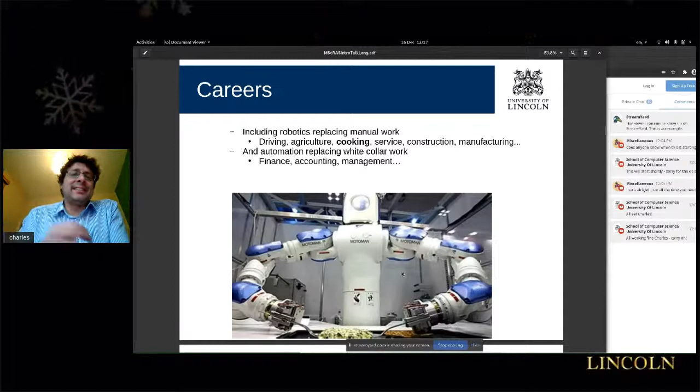If we continue going through the food chain, we're seeing automation beyond the agricultural field and going out into food processing - both the factories and cafes and restaurants - using systems such as this robotic meal maker here.

Traditional industrial automation takes place in factories with conveyor belts and production lines. Many of the techniques we teach on the MSc are appropriate in those settings, but we're also seeing this much more precise, customization version of robotics in the food industry.

So here's a robot that is preparing one meal as a human chef would be preparing it. Now that means every meal can be a little bit different, customized to what the customers are asking for. That's different from the traditional process of making 50,000 tins of soup that are all exactly the same.

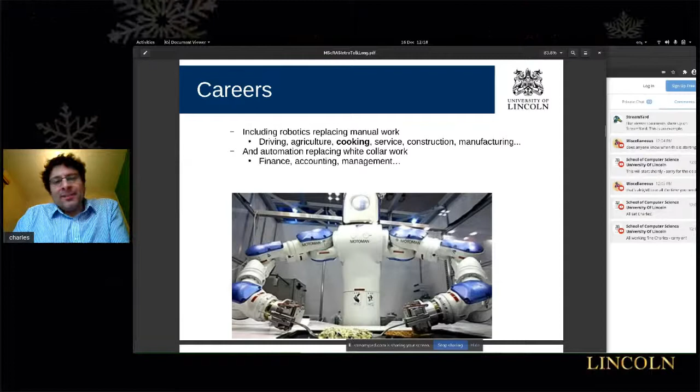So this kind of system is going to require a lot of advanced AI. On a classical production line, you can pretty much do the same movements on every robot every time - the robot arms you see on a vehicle production line are normally just going through a pre-programmed sequence of motions. Whereas highly interactive food preparation like this system is going to be all about monitoring the state of the food, looking at it with your cameras, with your eyes, and figuring out what you're going to do in response to how the food is moving around.

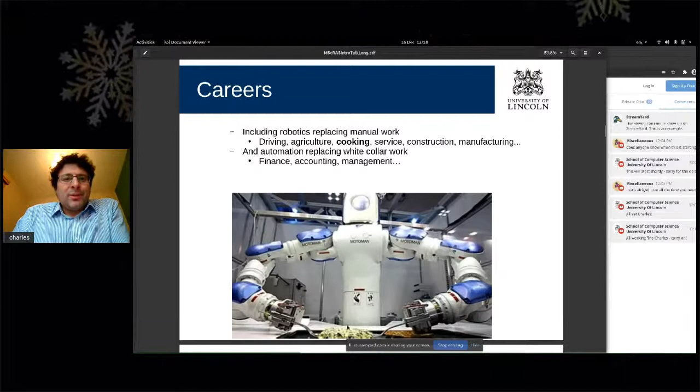Food and agricultural products in general can be much more natural and therefore much harder to predict their behavior than purely mechanical components like the metallic components of a car on a vehicle production line.

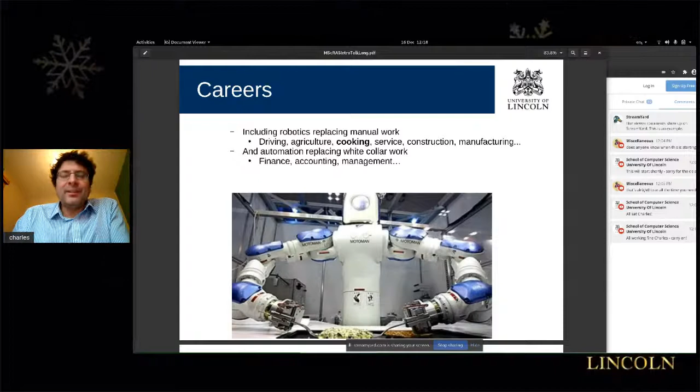Especially during the COVID pandemic, we are generally concerned to reduce the amount of human interaction in the economic part of the world. So applications of robotics to delivering stuff to end users has become very relevant recently. This includes last mile delivery vehicles, small robots that run around the city and deliver Amazon packages or Deliveroo pizzas to people's houses, taking the human away from the doorstep, which is a potential vector for COVID-19 transmission.

You might also see this occurring in places like cafes and restaurants, where you want to remove the need for human service staff to come and make the last few meters of delivery of the food to customers' tables.

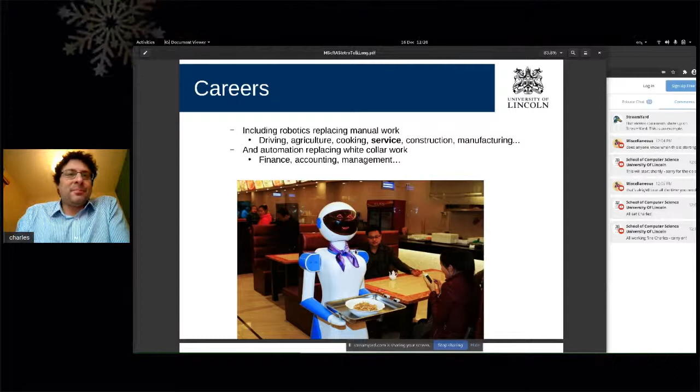This kind of technology was once science fiction, and it now exists for real in a few places in the world, especially in countries like Japan, which are culturally predisposed to robotics. It began as a gimmick - come to our restaurant, it has robot waiting staff. Now it's becoming much more realistic for much wider use and more safe and hygienic use.

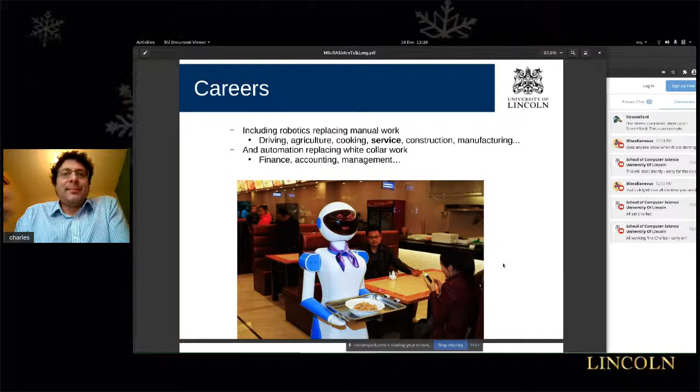And we have robots like this developed here in Lincoln. If you visit the Lincoln Collection Museum, for example, you'll already find one of our robots looking quite similar to this, which is acting as a robot tour guide. It's showing visitors around, recommending exhibits for them to look at, telling them the backstory of some of those exhibits.

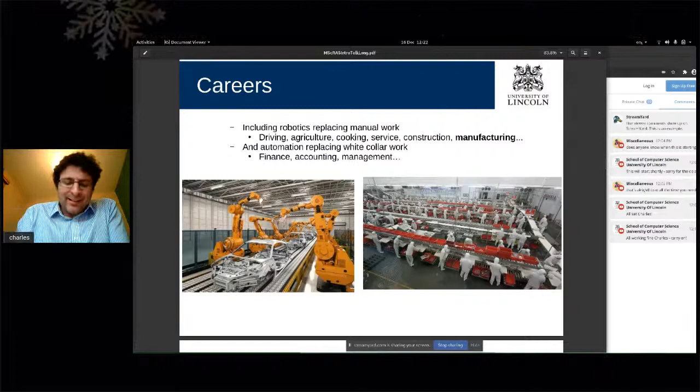What we're seeing now with AI systems and machine vision coming in is a much more interactive version of this, where the systems can monitor what is going on and change their behavior in response to it. So if you learn to program robot arms like this, you can not only go out and help to automate an existing style of factory, moving the arms around in a pre-programmed way, but increasingly these companies are interested to bring in your AI and machine vision knowledge to make them much more interactive.

So this is why a car plant is currently highly automated, whereas a food processing plant, like the one on the right here, tends not to be. You can see there are still a lot of human workers in a food plant like this. If you ever watch the TV series How It's Made, you'll see a wonderful mixture of mechanization and automation, but also these human workers being placed all along production lines.

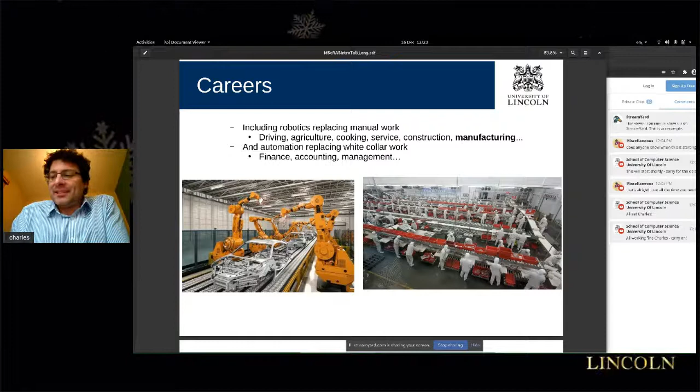And it's jobs like this that are becoming much more automatable now that we have more advanced AI and machine vision. There's a lot of people who are paid to stand by a production line and inspect things, often items of food coming down that line, to check if they're okay and to pick them up and move them around in certain ways, which has until very recently required that human intelligence because every product is a little bit different. Now we're seeing AI and machine vision coming in. Much more of this is going to get automated very soon, maybe by you.

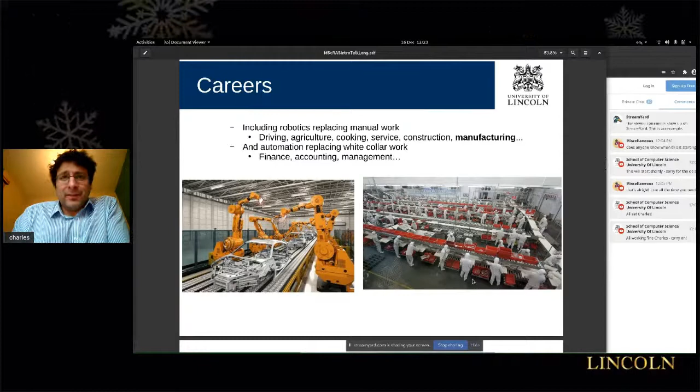But it's not just physical stuff that's becoming automated, it's also these so-called white-collar jobs, the finance, accounting, management careers that are traditionally seen as good graduate careers, are all starting to fall and to be replaced by computer scientists and robotics and autonomous systems trained people.

The humans were setting up the ideas and the algorithms, and then they're executed at very high speeds by these autonomous systems.

So human traders are becoming quite an endangered species now. You might be used to seeing pictures of trading floors with lots of humans either standing around or sitting in front of computer screens. Much of that activity is now being replaced by silent computer systems, which just hum away through the day and the night, placing these trades automatically.

I think it was Goldman Sachs, one of the big banks, recently announced it is going to stop hiring traders who cannot code. This used to be a nice graduate career, being a trader, but that's all going to be replaced by computer people, robotics and autonomous systems graduates.

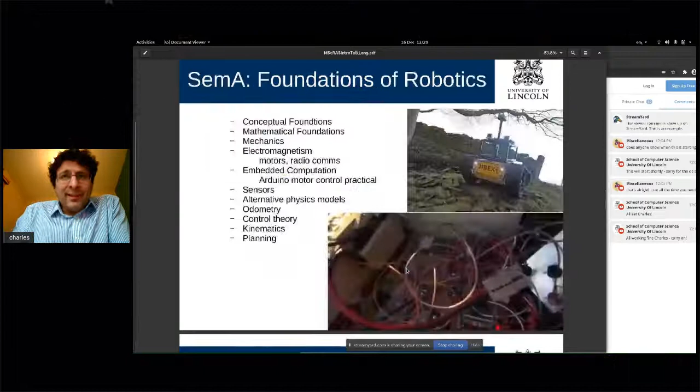So Foundations of Robotics, this is the module that I teach myself. And roughly it looks like this.

We're starting at the lowest level of bits of wire and silicon and motors and sensors and actuators. This is the mechatronics module. You'll learn how these components work. This is the inside of the IBEX robot that I've been working on.

This is how you actually build a robot, a physical robot that can move and sense in the world. So we'll study some theories of physics like mechanics and electromagnetism, the mathematical foundations required by that. We'll do some embedded systems, especially Arduino programming. You'll find this used in a lot of these systems.

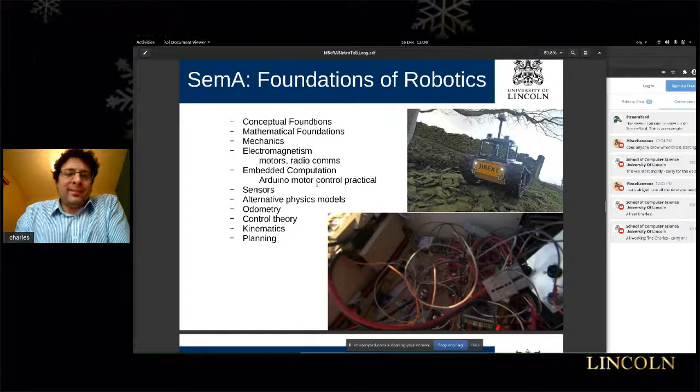Then the module will build on that and go into some basic algorithms that sit at a slightly higher level. So algorithms for doing control, for getting a motor to behave in the way you want it to behave. Kinematics and planning, that's about how you move either your whole robot around, or how you move a component of a robot, like part of a robot arm, to get it into a position that you want it to be.

At the same time, you're studying research methods. Here you will learn how to run a scientific experiment, how to analyze it, how to report it, and how to do the statistical analysis required to make people believe in it. How many times does your robot have to actually pick an apple before your reader believes that the system works, and that it didn't just happen by chance?

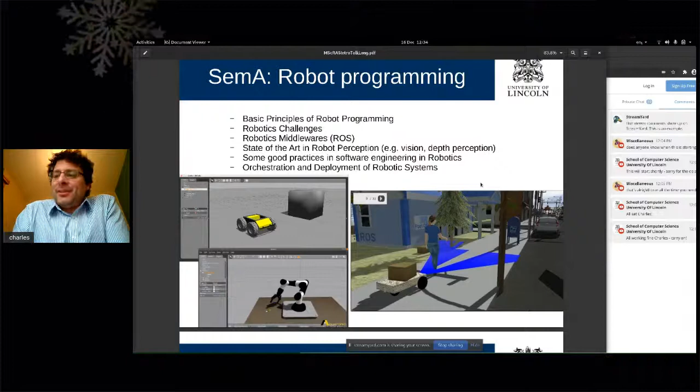At the same time, you will hopefully pick up some good software engineering practices in robotics. There are specific forms of software engineering that are useful in robotics that you might not have seen before, or that are less relevant in other fields. So you'll learn things such as continuous integration, continuous deployment, and how that gets applied in the world of ROS nodes.

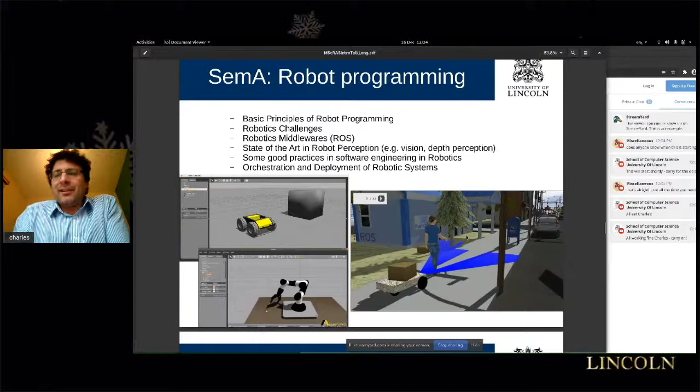Usually when you build a robot system, you don't do it by yourself. You have a bunch of programmers who are each responsible for one of these components, and you have to learn how to do that software engineering together to make sure that your systems will stick together and work in practice.

And this is really the fundamental equation which drives most of modern robotics AI, because it tells you, if something in the world caused something in your sensors, and you've seen the thing in your sensors, you want to work backwards and say, what's the probability of that thing in the world?

Now, I've seen a black blob move along the sky. What's the probability that it was a plane? And what's the probability that plane was at a particular location?

You'll probably study a lot about burglars and earthquakes. These are two things that could make your alarm go off in your house. And if your burglar alarm goes off, your friends John and Mary might call you and say they think they heard your burglar alarm going off. If John and Mary have both called you saying they think your alarm's going off, what's the probability that your house has in fact been burgled? Or what's the probability that an earthquake has taken place?

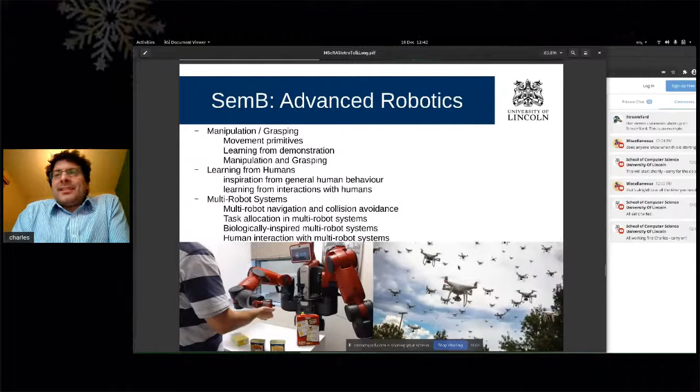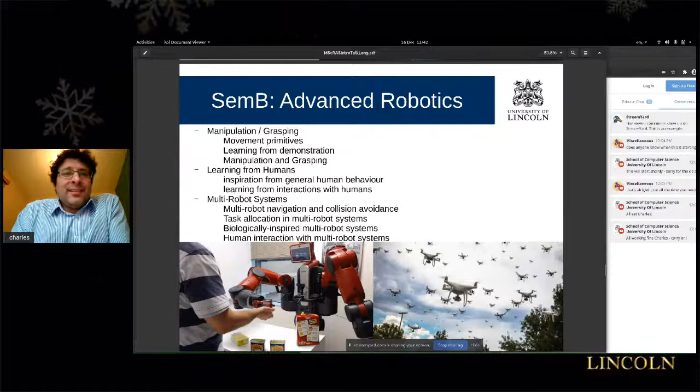We're currently very interested in multi-robot systems. This is a drone swarm. How does AI planning and control theory change when you've got 100 robots working together? What if they can communicate with one another? What if they can't? How do they avoid colliding? How do they avoid trying to do the same piece of work someone else is doing?

And then finally, in the frontiers module, we'll go right to the cutting edge, wherever that happens to be in the current year. We can't tell you what will be taught here because the current year hasn't happened yet, but we'll bring in a series of speakers doing interesting and exciting things right on the cutting edge, people who've just been publishing new research in their fields.

So for example, this might involve things like space robotics. There are currently many Mars rovers out on their way to Mars, and also similar systems on their way to the moon at the moment.

After semester B, you will go on to do your projects. During the summer, you can work with one of our academics. Some students will work on an existing project happening in Lincoln. Others will work on their own project, their own idea, depending on your interests.

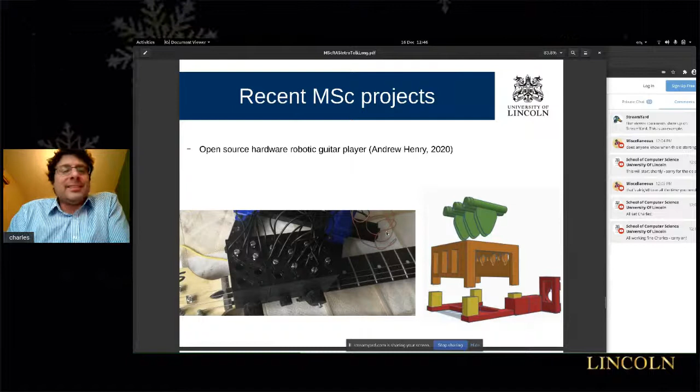For example, we've talked a lot about AI planning systems to figure out how best to perform particular pieces of music. Real human guitarists make a lot of decisions about which fingers to use, which strings to use. There are different ways of playing the same note, and there are some nice AI algorithms that can be layered on top of this system at those levels.

This is the tool chain that most students will use during those projects, the same tools taught during the modules. Most of what we do uses open source systems—we use Ubuntu and GNU very heavily. A lot of programming is done in Python and C++. You will learn about Arduinos for embedded systems and mechatronics.

Robotics integration is done through ROS, the Robot Operating System. Machine vision is usually done through the OpenCV libraries. Students also use FreeCAD for mechanical designs, such as the robot guitar you saw. We're heavy users of Git for version control and for helping students collaborate together.

We use LaTeX very heavily for our academic report writing. We also use a fairly standard set of mathematical tools.

You'll need some basic understanding of these ideas when you first arrive. We can help you prepare during the summer before you come. There's a bit of a refresher in the foundations module, but it tends to be a lot of linear algebra—vectors, matrices, trigonometry, rotations.

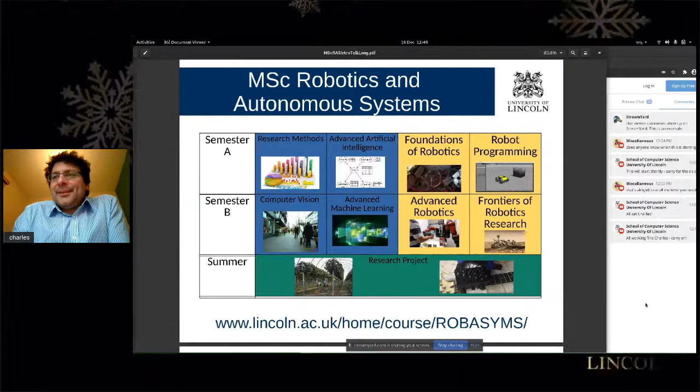I believe we've got two of our current students, David and Harry, on this call, who are able to answer any questions you might have about the MSc.

Do we have David and Harry here? I can see them appearing on the stream. Hi, David. Hi, Harry. Hello.

Does anyone have any questions they'd like to throw at our current MSc students? Or while we're waiting, would either of you like to just generally talk a little bit about your experiences so far?

Yeah, it's been quite good so far. Coming from the University of Lincoln undergraduate computer science program, it's been quite a nice transition because the modules I chose were image processing and the robotics module. So it's been quite an easy transition onto the MSc, and generally it's been quite good, especially considering the COVID restrictions and everything at the moment.

So how do you find it being around mechanical engineers and people from these other backgrounds? How's the relationship between the computer scientists and everybody else? I think it's pretty good. It's just interesting to see how much more they know about actual mechanical systems, and how much more I need to understand. David, do you have any ideas on what you think?